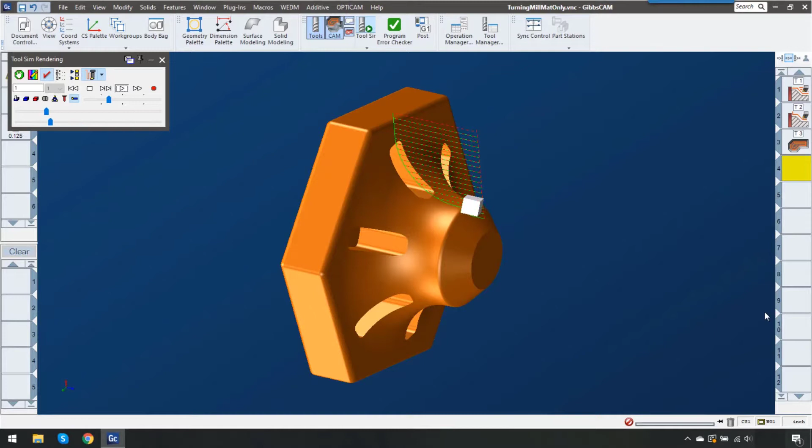This video is going to show the new 3D material only feature in GibbsCAM 14. This feature will calculate the leftover material not just between operations, but between coordinate systems and even between turning and milling operations. We're going to use this example here. So let me get out of simulation and show you how it works.

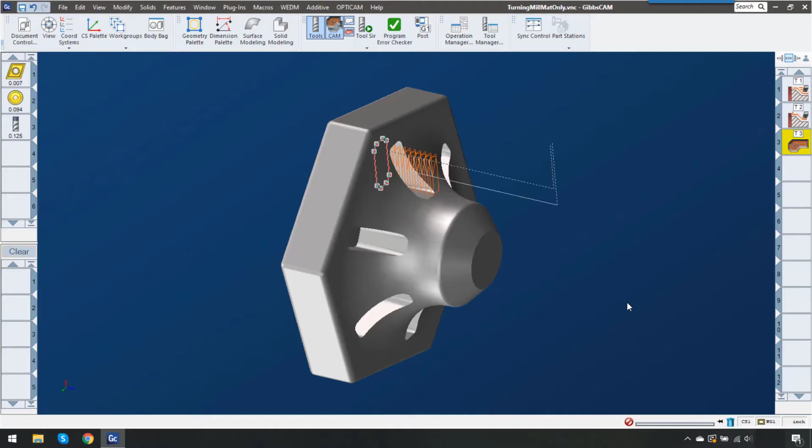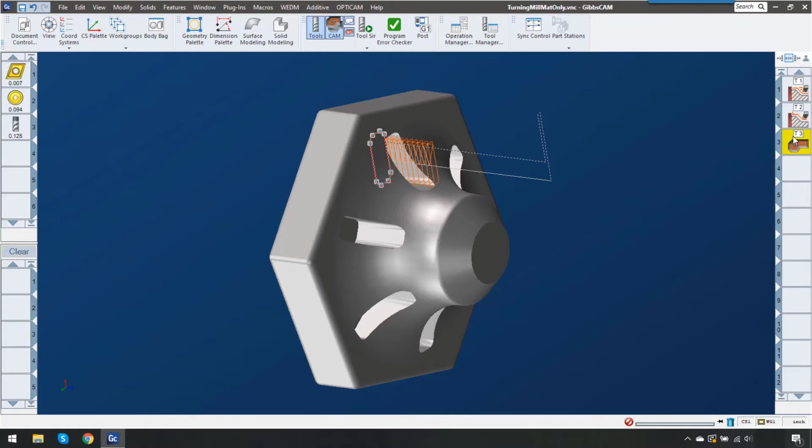So after this part is turned, we're going to end up with a profile, something like this. And because of this profile, you can see that there's going to be a lot of air cutting here to do this pocket. What I want to do is I want to tell GibbsCAM, hey, there was something that happened before this. Let's ignore that material that's not there. And now in GibbsCAM 14, that's really easy to do.

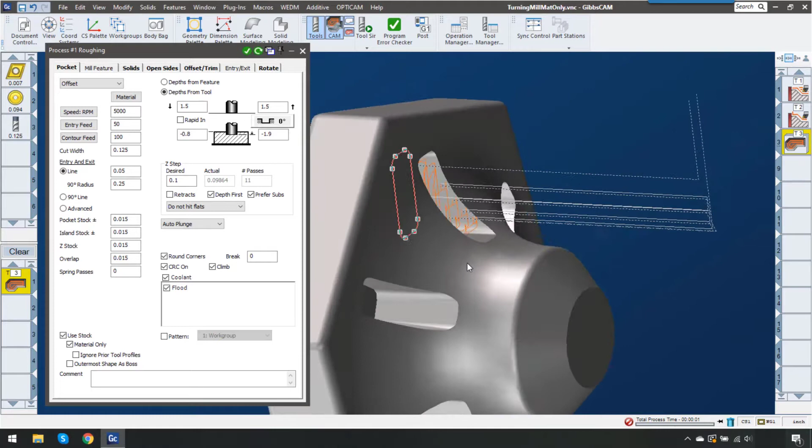So down here at the bottom, we have use stock and just click on material only. This will calculate the leftover material regardless of operation or coordinate system. Now you can see how much more efficient that toolpath is. This is going to cut down on air cutting, which is going to really speed up your cycle time and get parts off the machine much faster.

Now this example was using the difference between a milling operation and a turning operation. Now let me show an example where it's between two milling operations but using different coordinate systems. This milling part, I want to machine on my 5th axis. I need to rough it out and finish it, but the reach on my roughing tool is only about 1.5 inches, and you can see here it's 3.5 inches tall. So I'm not going to be able to get all the way down.

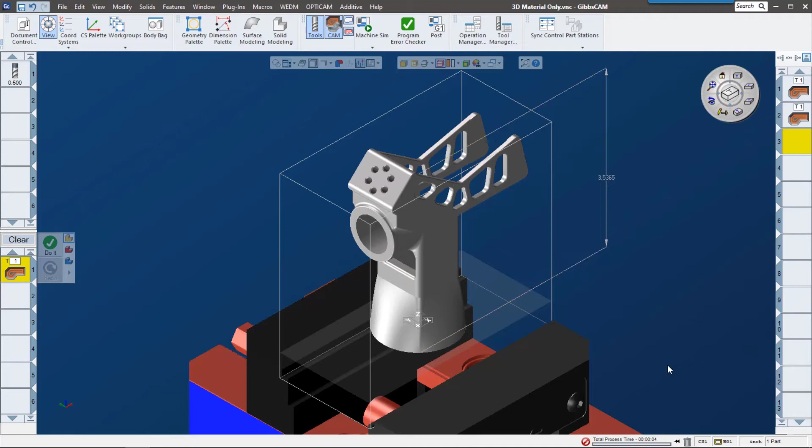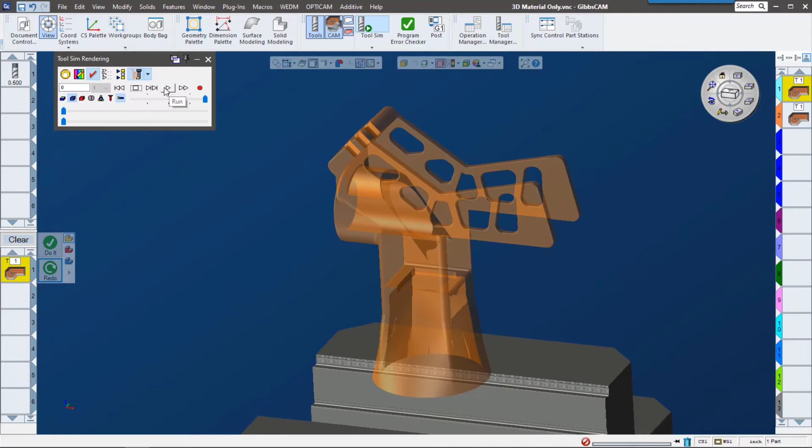Now, the problem is I don't want to have my second tool in this setup have to go through and recut all of the material that it thinks is still there from the previous setup. Now I'll show you an example of that with tool simulation. Here's the toolpath representation from the first tool. Let me continue on to that second tool.

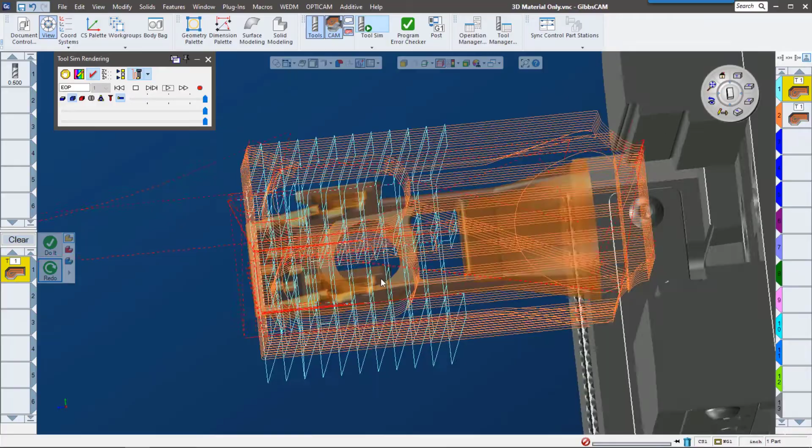So we can see that there's kind of this cross hatching where the two toolpaths actually overlap. If we look at the top view of this, we can see that the second toolpath is actually coming out and trying to clear away the material that's already gone. In GibbsCAM 14, it's really easy to change that. There's this checkbox that says material only. I'm going to go ahead and redo the toolpath. Let's go ahead and play it now.

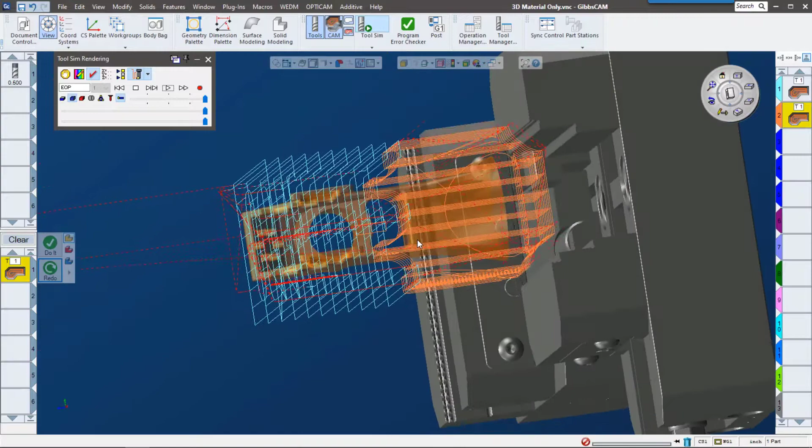Now we can see how that second toolpath only addresses the areas that the first toolpath missed. Let's check this out in Machine Sim. I'm going to go ahead and speed through that first toolpath. So we can see the material that it took away. It took away a good amount of material. Let me back up so we can see the rotation here.

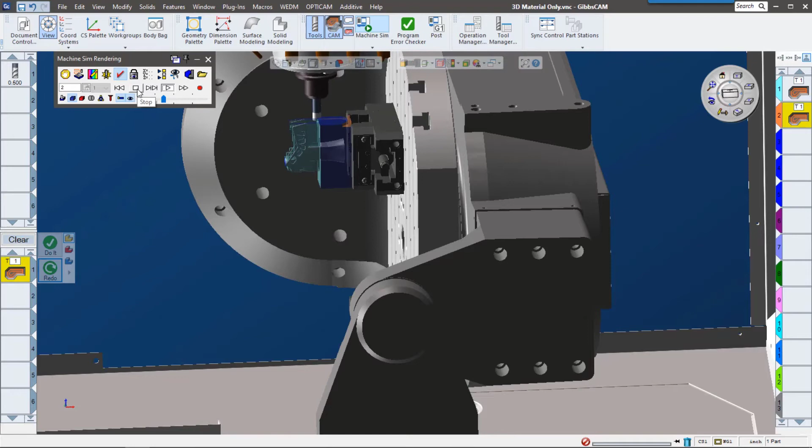So now you can see as I zoom in, that tool is only addressing the material that's left over from that first toolpath.